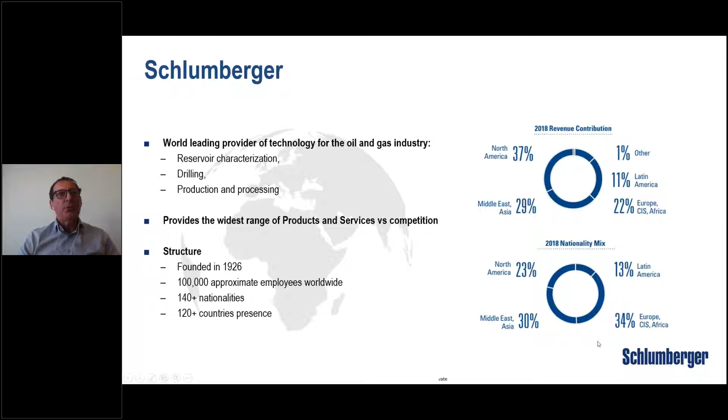I won't cover all the product lines and services of Schlumberger, but I want to focus on one activity that we call integrated services, because this is something we want to offer for the geothermal market that we will talk about today.

Schlumberger integrated services means that we provide turnkey wells drilled. We started this activity in the oil sector, where we have large fields with a large number of wells to be drilled, which makes it easier to mobilize equipment, resources, etc.

We are making this transition to geothermal. I will talk a bit about it later in my last slide, but we want to bring to the geothermal market this expertise of drilling wells that we have acquired worldwide. But for sure, we have to adapt to the geothermal market.

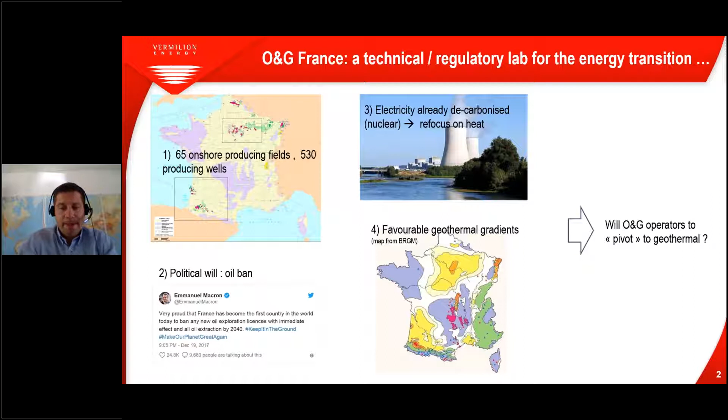We have wellhead temperatures as high as 95 degrees C, so there's plenty of heat available. At the moment, it's pretty much wasted, reinjected in the oil and gas wells, in the oil fields.

So we are doing two things: leveraging our infrastructure to produce low-cost geothermal energy. To do that, there's a huge effort to map our resources and map our neighbors' needs. When no one needs heat next to us, we try to bring new business in. So all of that results in a number of pilots to try and use the heat either directly or to produce electricity, and I'll show you an example of that.

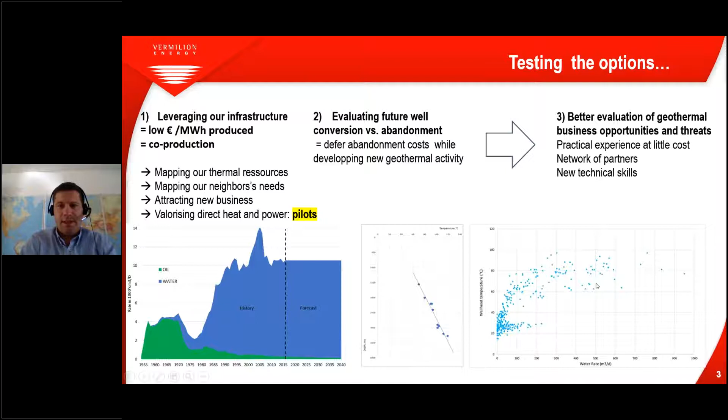The next slide shows an ongoing heat co-production pilot. It's a place, a facility, where we produce both oil and heat. The schematic shows there are 4 producing wells, producing oil, gas, and water—mainly water actually—and we have 3 injector wells.

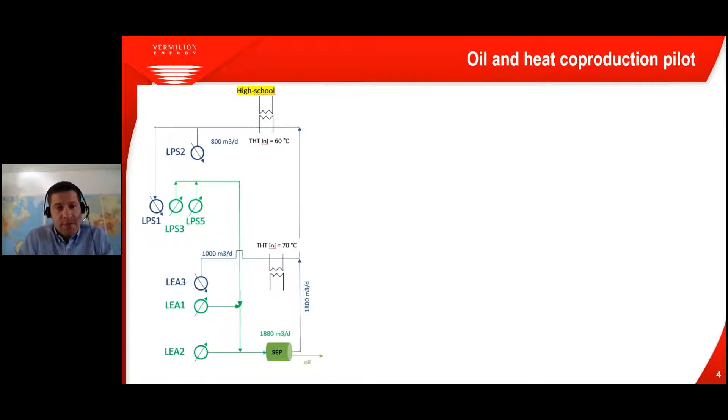After separation, the injection line runs to the injector wells, and the project is about installing a heat exchanger on the injection line to serve a high school. The temperature at the heat exchanger is expected to be around 60 degrees, which is enough to provide some of the heat capacity required.

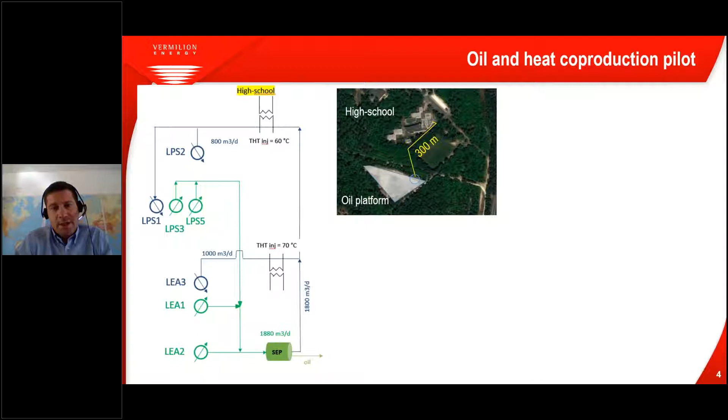I'm showing you a map of the location. You can see the oil platform at the bottom of the picture, and 300 meters north, the high school. So there will be a 300 meter long pipe to connect the heat exchanger on our site to the end user. This is a schematic view of the heat exchanger on our oil site—it's a bypass on the injection line, really.

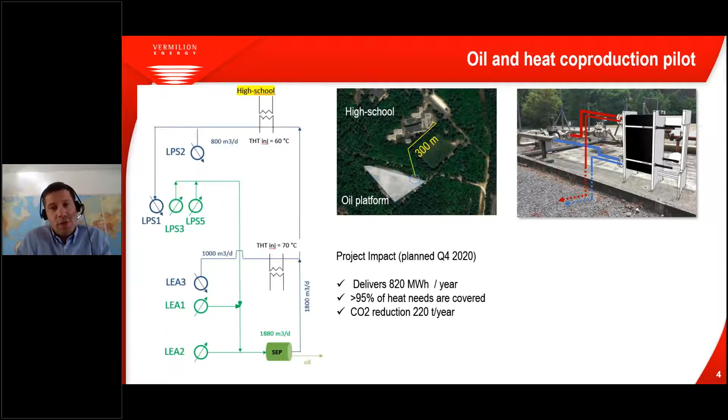In terms of impact, the numbers might look trivial, but this is the first step for us—a way to learn the business again. It will deliver 800 megawatt hours per year. The benefit for the end user is that almost 100% of its needs are covered, and it reduces its CO2 impact by almost 100%, about 200 tons per year.

Again, it doesn't go without challenges. There are the classical geothermal subsurface challenges: thermal interference in the reservoir as you inject colder water, scaling, and injectivity risks. There are also issues related to the fact that we are co-producing oil and water.

One issue is that essentially your long-term thermal resources depend on the Brent price, because your geothermal revenues don't offset your oil producing OPEX, mainly electricity. There's also the issue of the load factor of the heat—the high school is used only a couple of months a year, not in the evening, so you don't have a huge energy intensity there to offset your cost. And then there's the whole issue of balancing oil production optimization, which usually means producing more oil and less water, with delivering the heat you promised.

On top of that, there are regulatory challenges because essentially in France, co-production is a bit of a gray area, and there were a number of environmental challenges because this zone is really sensitive. But nevertheless, we are close to establishing this geothermal project—it will be done in the next few weeks, it will really start. This is an example of a project in the southwest of France.

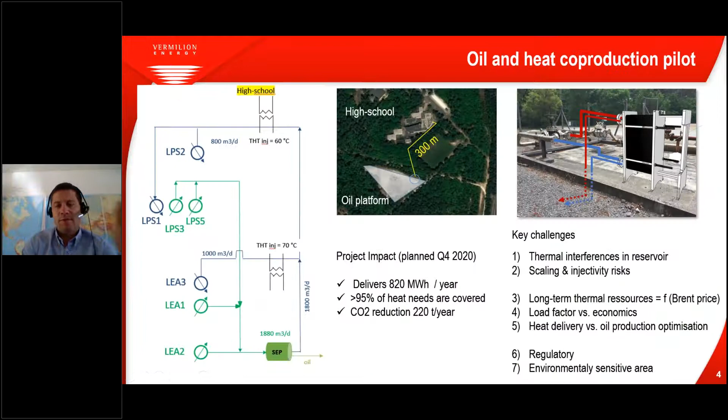I just want to share with you a couple of technical points, but I'm not going to expand on that—the usual thermal modeling, which requires some complex workflows. We're talking about surface thermal modeling, well modeling, reservoir modeling, all linked to a number of assumptions around end user heat needs that depend on seasonality and so on. This is a rather complex thermal modeling; we don't have all the tools, so we had to do a mix of known tools and some handmade tools. We also had to acquire temperature data to calibrate the well and reservoir models.

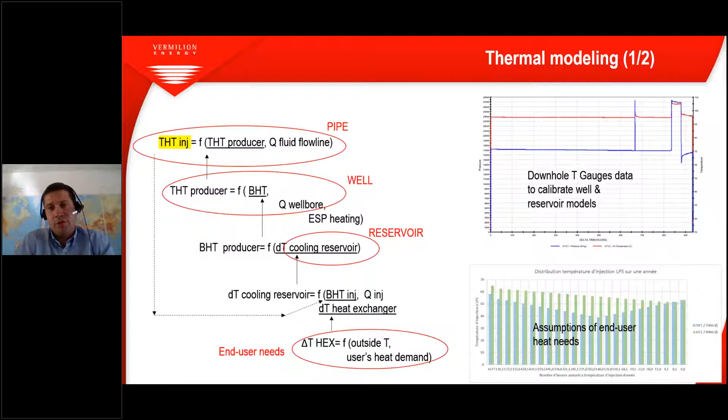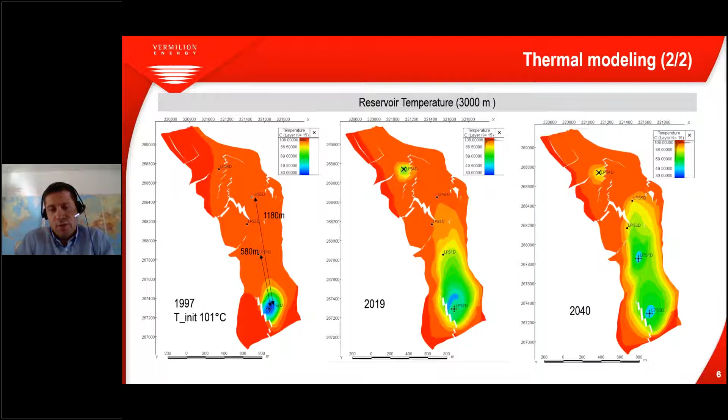Something that is classic in the geothermal industry and less so in the oil business is having to deal with temperature in the reservoir. This slide shows the modeled change in temperature in the reservoir at 3,000 meters deep as the injection cold front progresses toward the producer. This was a key de-risking activity for us to understand the long-term thermal impact in the reservoir on the long-term resources.

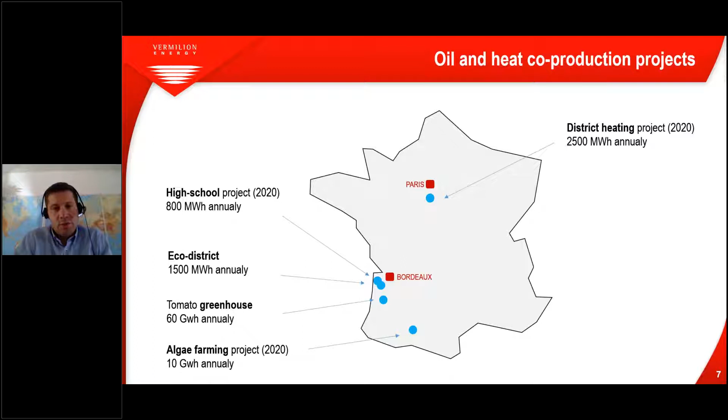I'll conclude on this oil and heat co-production project to share some of the ongoing and executed projects. As you can see, we have a number of diverse projects ongoing. A tomato greenhouse is currently using our heat. An eco district is also using our heat. I've talked about the high school project, and a number of other projects, one on algae farming and one on district heating, are also underway. So we try to expand and scale up to our entire portfolio.

So we've talked about direct use of heat. I want to talk about the use of heat in terms of electricity production. Electricity production is indeed often used only with very high temperature resources. People think about Soultz or other projects like this. The question that we're trying to solve with our partner Enogia here is whether we can produce some electricity at a lower temperature range.

We've installed this machine here at one of our wellheads in the Paris Basin. The wellhead fluid temperature is 90 degrees C. The rate there, you can see, is about 21 cubic meters an hour. And by design, we expect to produce 16 kilowatts of power.

The tests are actually ongoing. It only started a few days ago, so this is really new data. I think you are the first ones to see this, and the chart there has been recorded just a couple of days ago.

It's under optimization, but at the moment we are currently producing about 13 kilowatts of electric power. To give you again the context on the impact, it's about 10% of the power consumed by our downhole pumps. This will be confirmed in terms of seasonality, night and day, winter and summer, in the next few months.

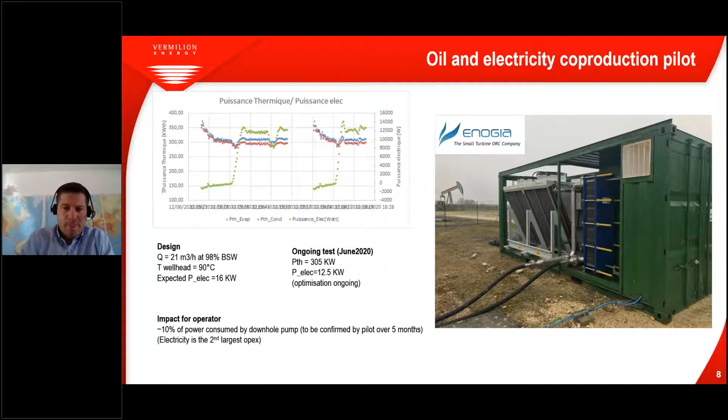So I will just conclude with a couple of take-home messages, my learnings. Heat co-production is, in my view, a win-win first step. Regulatory enablers are needed. Of course, there are many synergies with oil and gas. Heat co-production is, however, limited to only a few facilities that are close enough to the customers. I'm not certain it is a game changer at EU scale. Also, in terms of oil and gas conversion, I think it's more likely to be the exception than the norm.

There are a number of issues that we can talk about. One piece of feedback from the people we are meeting is that they really need to address both heat and cold for a project to go forward.

Now, in terms of the role of oil and gas, and I'll conclude on that: oil and gas players have been investing quite massively recently in many renewable energies, but not geothermal energy. It seems that the main blocker is scalability. I guess we'll discuss that, and there will be questions and opinions about it. So indeed, we need to think about a big portfolio to get the profitability.

My view also is that it requires the oil and gas industry to shift from a global commodity mindset, where as an oil producer I don't really care who my customer is, to a mindset where I do care who my customer is, and actually my customer is my operations' neighbor. My view is that geothermal is a unique bridge between traditional oil and gas geoscience and drilling skills and clean energy. This is something oil companies should leverage.

I think a priori we have some technical problems, we don't see you, we don't hear you. Miklos? Now I can hear you, and I see a coronavirus prevention screen. Okay, sorry, I have a problem with internet, I was obliged to reboot my computer. I try to share my webcam but I don't know if you see me. We don't see you but we can hear you. It seems the internet is not very good, maybe you see me now? It should come slowly. We see a black screen, maybe it will come slowly.